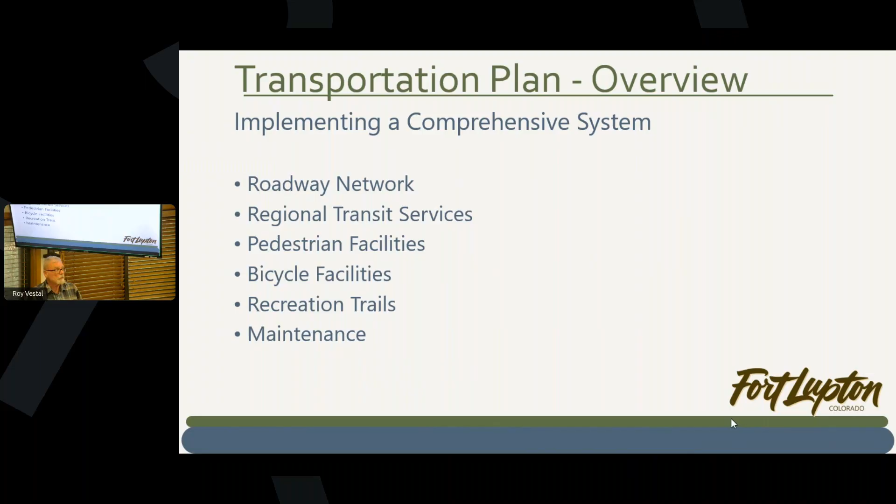This plan is related to several others and includes information from other master plans: the Comprehensive Plan, Parks and Trails Master Plan, Upper Front Range Transportation Plan, Weld County Transportation Plan, the US 85 and 52 PEL and access control plans, and our utility master plans.

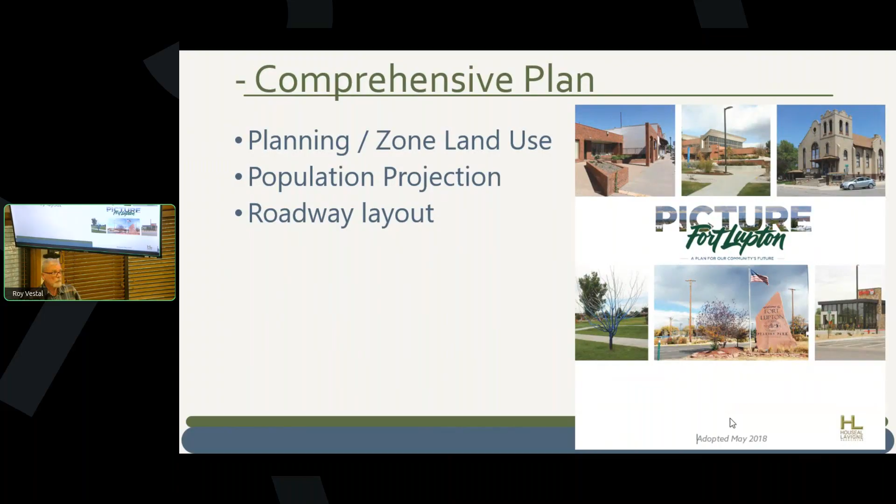The Comprehensive Plan is the most integral or interrelated, because the transportation plan is actually a part of the comprehensive plan. The information we take from the comprehensive plan to make determinations includes the planning zone and land use, population projections, and overall needed roadway layout.

The Parks and Trails Master Plan is also a part of the comprehensive plan. We take information from that plan to determine connections needed, bikeways, pedestrian access, and the trail system.

The transportation system is the most important part of the transportation plan for determining what right-of-way needs we have and which direction, pun intended, travel is going to be going.

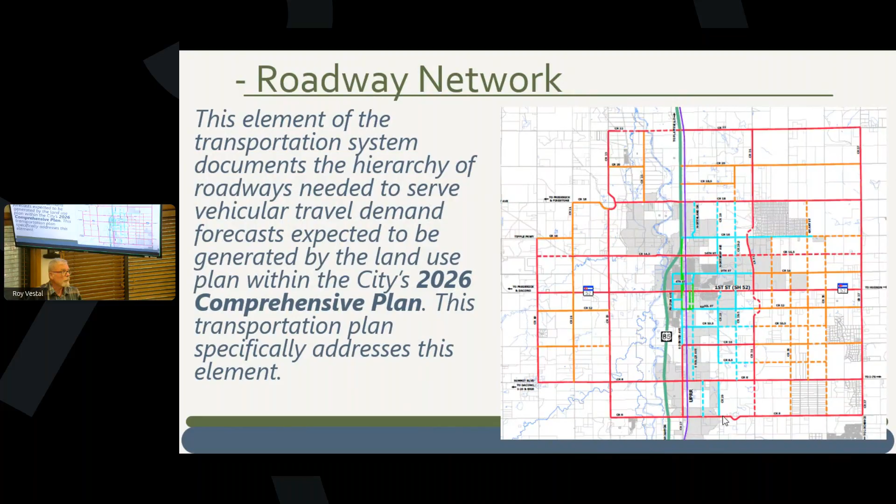Tonight's presentation is primarily focused on the Union Pacific Railroad and CDOT, and our interactions with our transportation plan and roadway network.

Union Pacific Railroad: we have 11 crossings through the city, and it kind of bisects the city. There are right-of-way issues, as they own right-of-way adjacent to their tracks and make use of that property as well.

The city leases a lot of the right-of-way, primarily from County Road 12 all the way up to 14th Street on the east side of the railroad tracks. We have a lease for the railroad right-of-way, and that's where the rec center is situated, along with a lot of parks along there and a public works shop.

So railroad crossings: we have 11, all the way from County Road 8 up to County Road 18. We're also looking ahead for potential annexations in the future, which would include 3 more crossings, County Road 18 and a half to 20.

There are many projects that need to improve those cross sections, things we're looking at as far as adding gates and lights, and abandoning a right-of-way, for instance County Road 10 and a half. The other one that's already been abandoned by Union Pacific is County Road 16 and a half.

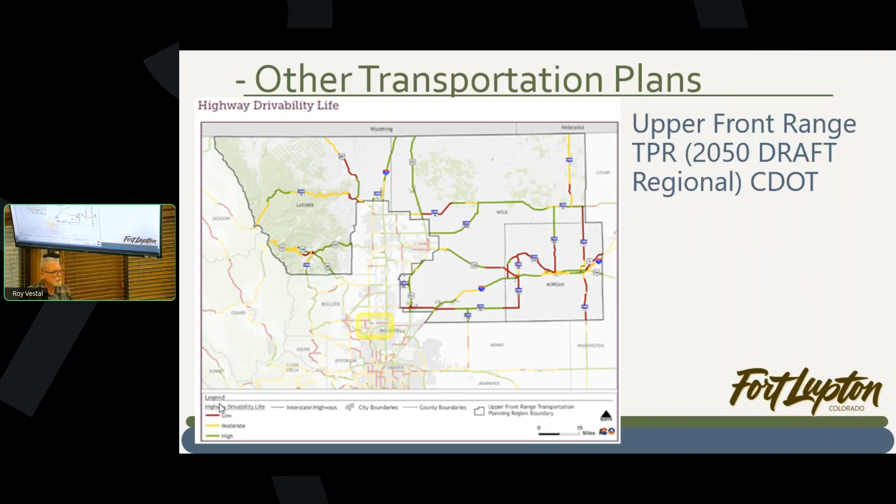And then there's access control plans and planning and environmental linkages studies. We have one with Highway 52 and one for Highway 85. Those documents and studies provide restrictions to access for the highway purposes.

Their principal purpose is moving traffic through and getting people to where they're going. The plans do include closures of existing access, changing of access configurations, intersection improvements, widening cross sections, future improvements, and right-of-way requirements.

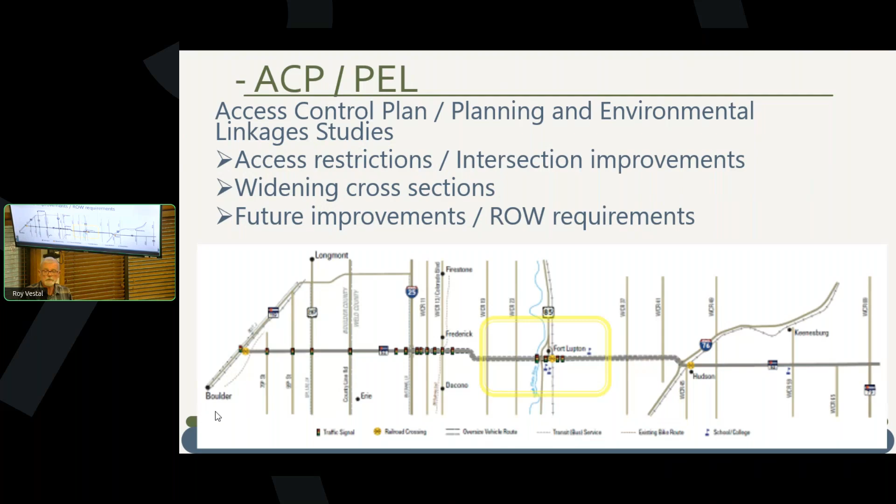As an example, Highway 52 ultimately is going to be a 5-lane through town, 2 lanes each direction, and one which I'll affectionately call a suicide lane to make left-hand turns out of sequence. There's a possibility eventually we'll get a median down the middle of 52. When this happens, I think they're going to restrict more and more access to the side streets.

And then Highway 85's planning and environmental linkages also restricted access, removed a lot of right-in, right-outs. For the future, definitely restricted and removed left turn out or cross traffic turns - basically safety hazards.

Fun fact, Fort Lupton has 2 of the most dangerous intersections along 85, that being 14th Street and County Road 8. There's finally been enough accidents that CDOT's attention was thrown over last year to County Road 8, and they closed that access off completely. So they're only right in, right out at this time.

Future improvements included with Highway 85 include overpasses at County Road 8 and an overpass at 14th Street. I can't remember if we had an overpass at County Road 18 as well - we just recently got the traffic signal at 18, that was about 2-3 years ago.

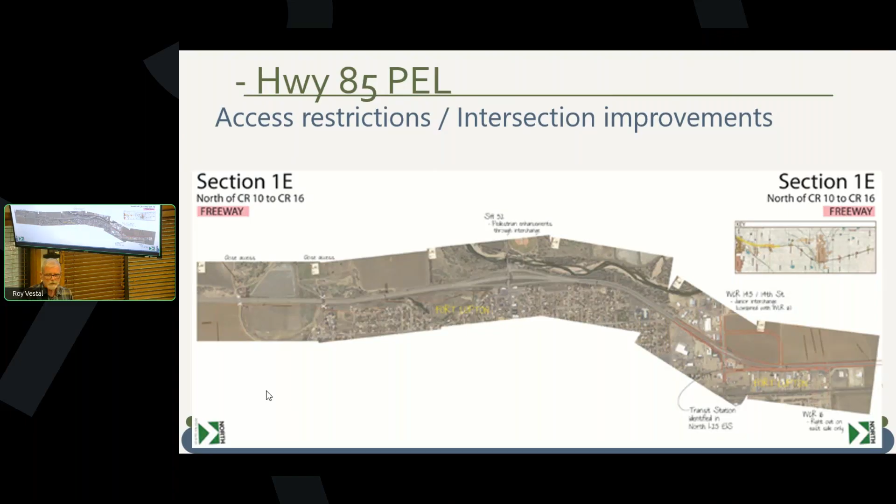So current projects that we're coordinating with CDOT on: we have the traffic signal at Raleigh. That's part of our lane reconfiguration when we did the seal coat on North Raleigh. We're waiting to stripe that last portion so we can stripe it with 4 lanes: a dedicated right turn, a middle through lane, and the far left as left turn only, separating left and through from how it is now. Then 1 lane going south, 1 lane going north.

Highway 52 mill and overlay project is in the works currently. We're coordinating with them as an extension of the current project they're working on, where they're overlaying roughly from I-25 to Highway 85, doing a mill and overlay. Following that, they'll continue the mill and overlay through town from Highway 85 all the way up to Safeway. Their funds won't cover concrete, so the city is going to pick up and improve or remove and improve the sidewalks where we have right-of-way availability. That's all currently under coordination and design with CDOT. The estimated out to bid is late '27 with construction happening in 2028.

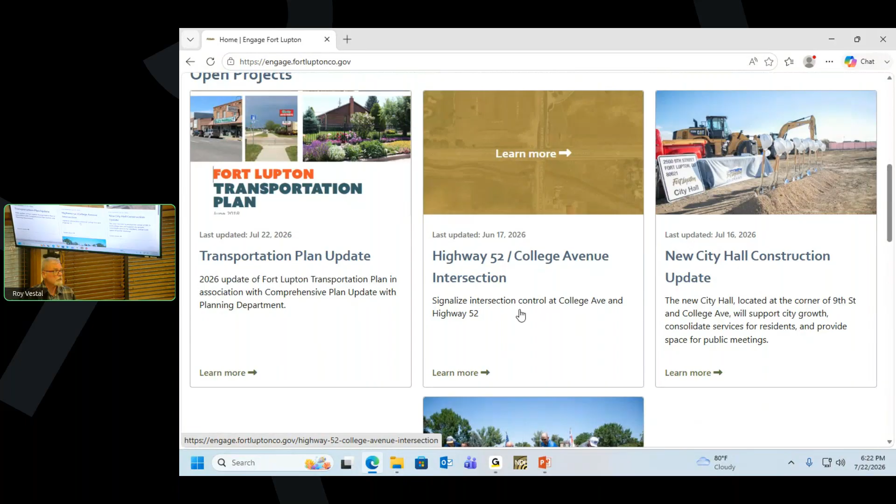But what you'll see when you go to this site is down below all the active projects we currently have. This includes our transportation plan. There's the Highway 52 College Avenue intersection, City Hall construction, and I see Doug has added the Coast Park project.

But if you click going into the transportation plan, this is what you'll see - a quick description. Please push the plus to follow so you get notified when things come up. Each tab is each presentation that we've done. This is tonight's - the input I'm looking for is a quick poll.

Do you support a railroad quiet zone through the city of Fort Lupton? There are several options: No, I like the train horn. No, we cannot afford it. Maybe when it fits in the budget. And yes, I can't stand the noise. And then there's also a feedback input where you can write down anything you want.

Give us feedback - stuff you like, where you want projects to happen, what you want to see as a priority. Each of the other presentations has a tab. It's just a simple click and you get a recording of the previous one so you can catch up if you missed one.

And then there's also activities in there, like this map to put a pin where you want to see a stop sign, where you need stop sign traffic control. Before you start plopping stop signs all over the place, I would suggest you watch the video to see why it would be bad to have stop signs at every intersection.

Then there's a poll for each of the potential slow-down options on a street. Basically asking, would you want a speed bump in your neighborhood? Would you want a chicane? If you want to know what a chicane is, watch the video. And street narrowing and other methods that we could do.

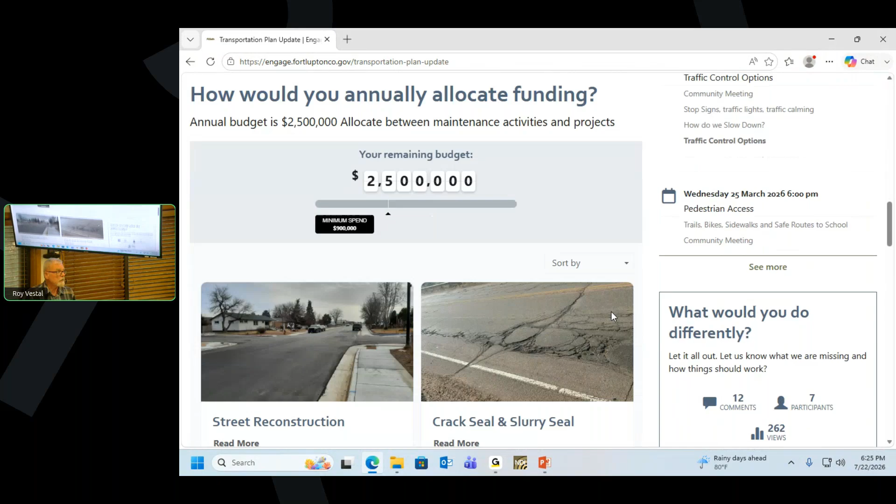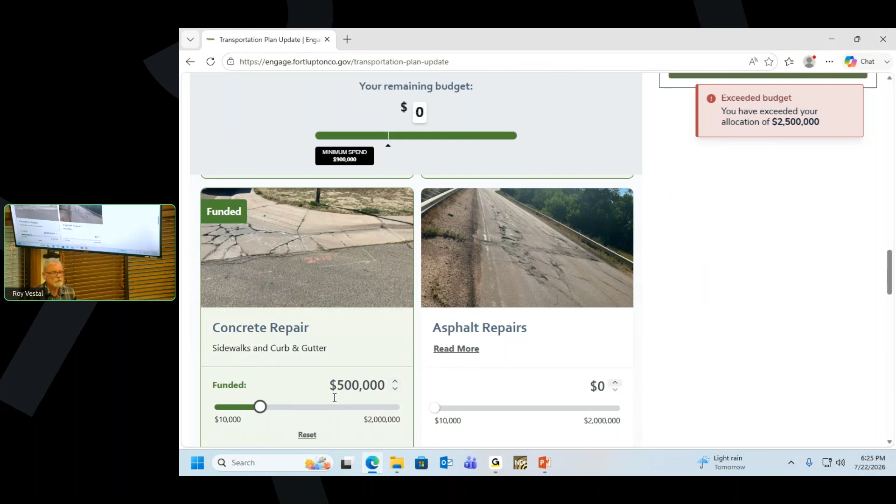There's a fun activity in here - you can pick from the different things how much money you want to throw at each of these different types of projects. Whether it's street reconstruction, all you do is slide the slider for how much you'd spend, and then for concrete repair, how much we could spend, and it's going to tell you when you run out of money. The budget is $2.5 million a year, but it gives you a chance to see what we go through.

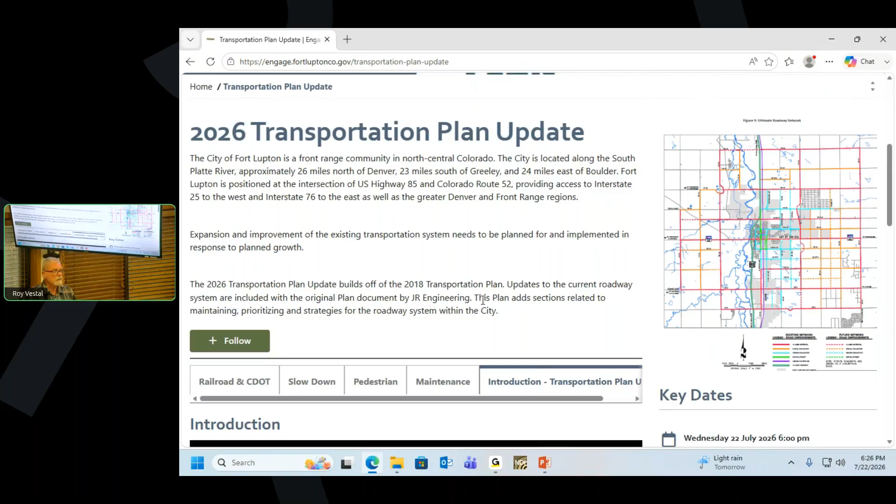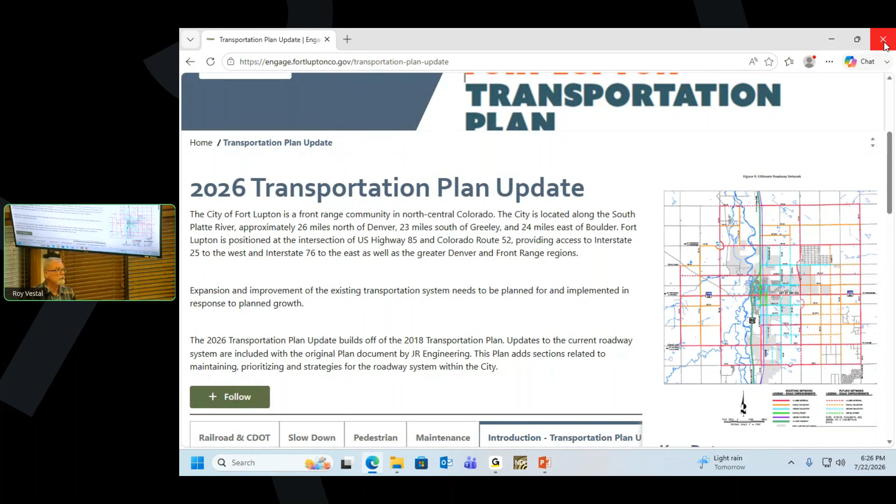And then the last one is the introduction, and there's again polls at the end. Well, I guess I didn't put the polls in there, but that'll give you an overall update for what we're doing with the plan. So please go to the site, register, check in regularly, and let it notify you. And with that, I have nothing else. Any questions?